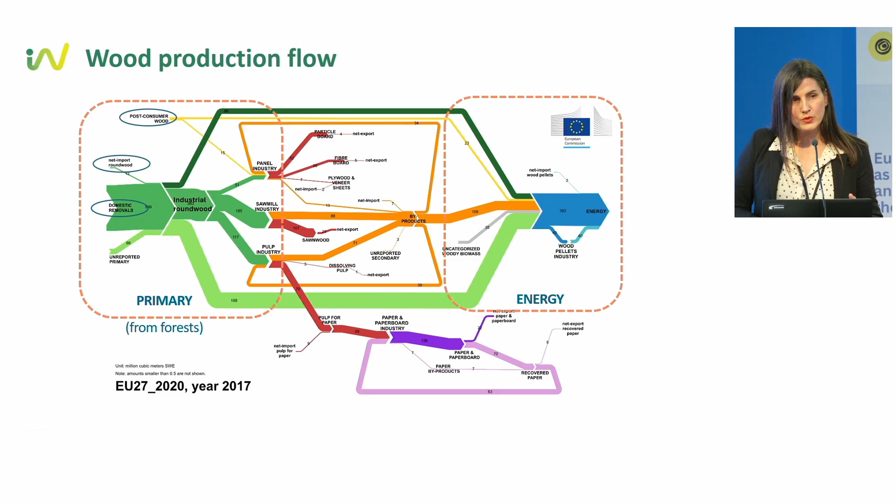Focusing on the first part, maybe it was not yet presented today, so I think it's good to have this general overview. Most of the wood used in the European industry - this is EU27 - comes from domestic removals, from primary wood from the forests, and a small part comes from recovered wood or also from imported round wood. The main 3 industries are sawmill industry, panel industry, and pulp. And sawmill industry consumes most of the logs from the domestic removals.

As we can see here, part of the domestic removals directly from the forest go to energy. And there are secondary products or byproducts, which are residues or secondary products from the industries, which can be used again in the industry, as we can see in the panel sector and in the pulp industry. We don't have data yet for the sawmill industry, how many reclaimed or reused or secondary products from the industry are used again in the sawmill industry. But most of the byproducts go also directly for energy.

So this is a picture for 2017, but what we would like to have is more added value products used in a cascade use before sending it to energy. This is a picture of 2022. This is data provided by FAOSTAT. We can see that from the domestic removals in EU27, 25% go directly to energy, and the industrial roundwood...

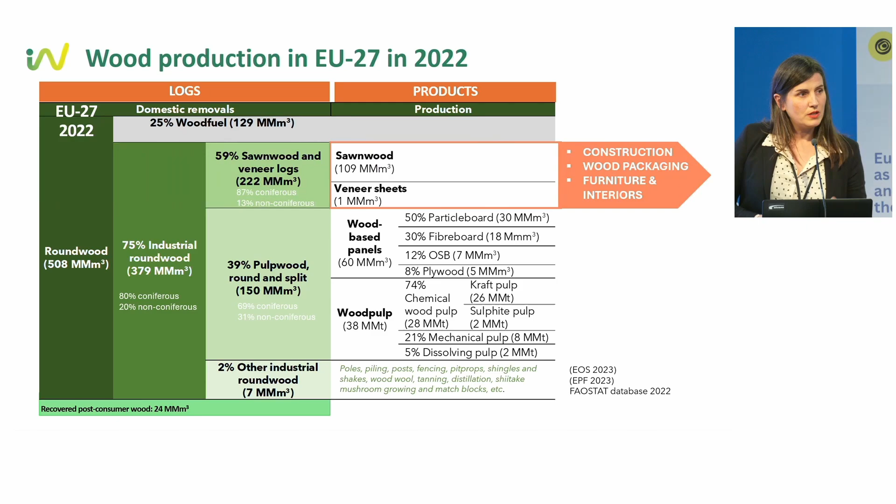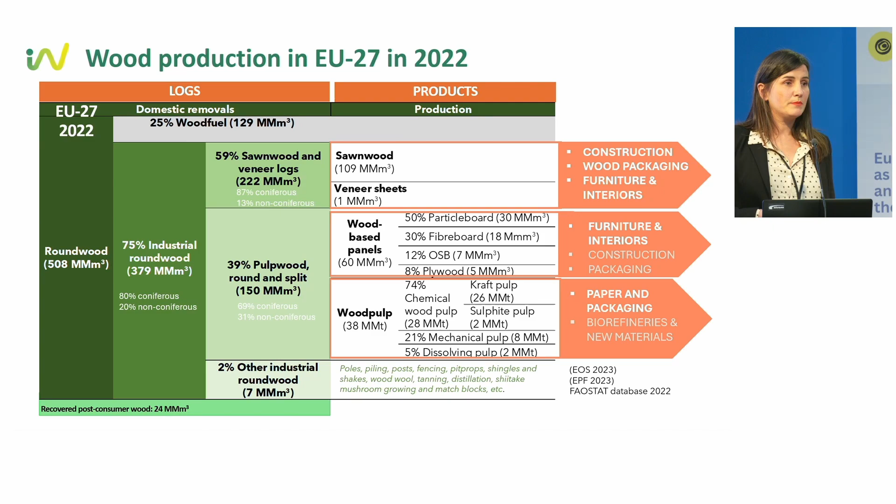The sawmill industry is mainly focused on construction, but also wood packaging, furniture and interiors. Wood-based panels are mainly for furniture, but also for construction and packaging. And wood pulp is mainly for paper, pulp and paper, but also for biorefineries and new materials. Focus now on sawnwood products. We can see here the historical trends in sawnwood production, and we can see the difference between coniferous and non-coniferous species, or softwood and hardwoods.

We can see that there is an increasing trend in softwood production, but there is a stable market for non-coniferous species, which is very, very low. Of course, we don't know the end uses of this quantity of sawnwood production, because the public databases don't provide this information, but based on several reports, we can say that around 10-12% of this sawnwood is for the construction industry, and around 7.4 million cubic meters for structural products.

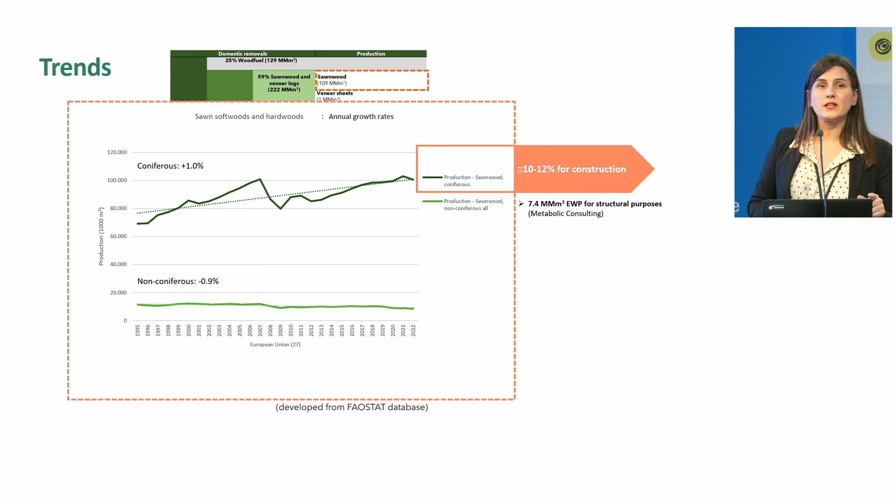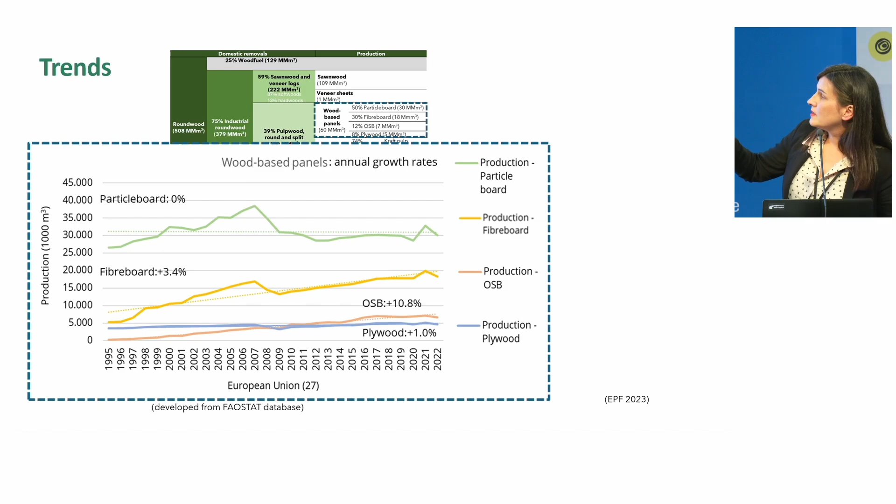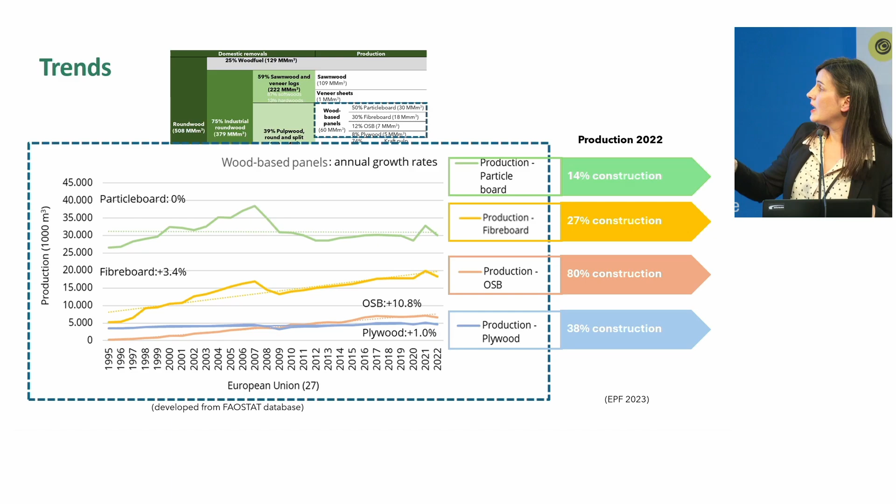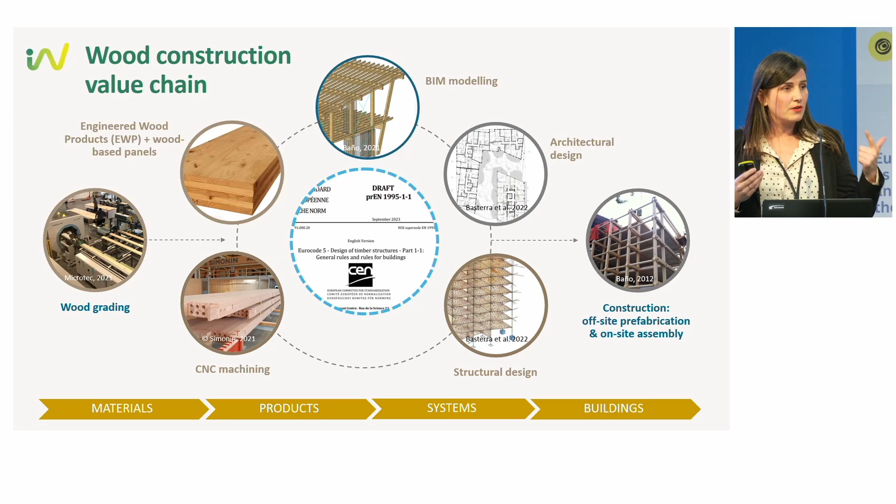Okay, this is just a general overview of the wood construction value chain. Our intention is to develop or design more industrialized timber buildings, and to do that we need to take into account many things: the architectural design, the structural design, the standards, the codes, also the modeling of these structures, and how to connect these models with the industry through CNC machines, numerical control machines, for shaping these elements. But at the first stage, we need the wood from the forest, and we need to know the properties of this raw material to develop elements for construction: glue-laminated timber, cross-laminated timber, and panels.

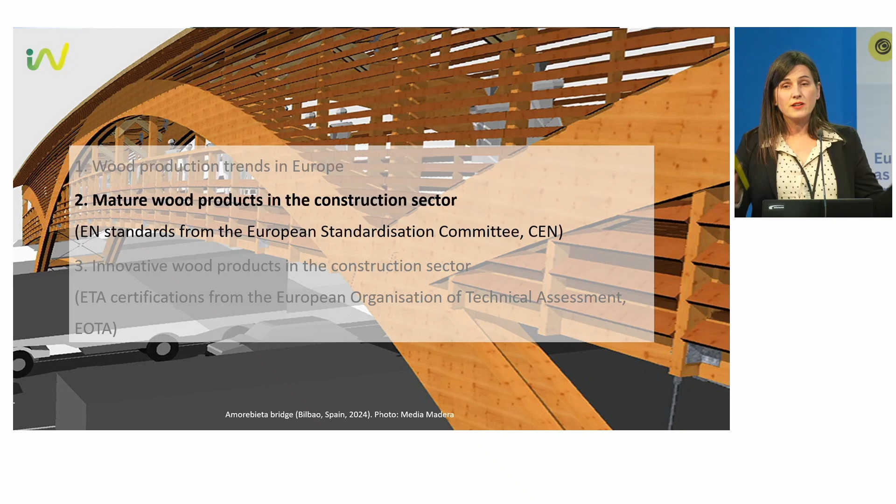Focus now on the construction sector, on mature products. We can say digitalization is a challenge for the construction sector, but not so much for the timber construction sector. Here's an example of a timber building, a timber bridge in Spain from 2004, 20 years ago, which was developed in a BIM model or CAD/CAM model and then manufactured on a numerical control machine. So timber construction is a pioneer in digitalization of the construction sector, and the rest of the construction sector needs to learn from timber construction.

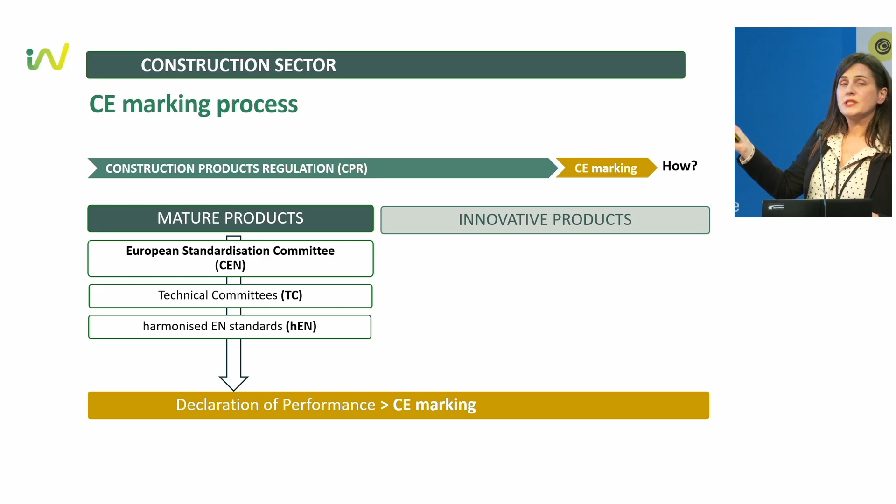Okay, what are mature products? We can say all the construction sector is regulated by the Construction Products Regulation, and to market any construction products in Europe, you need to obtain the CE marking. Mature products are those manufactured following the harmonized European standards, so you can obtain a declaration of performance and then the CE marking. Innovative products are products which don't yet have these harmonized European standards.

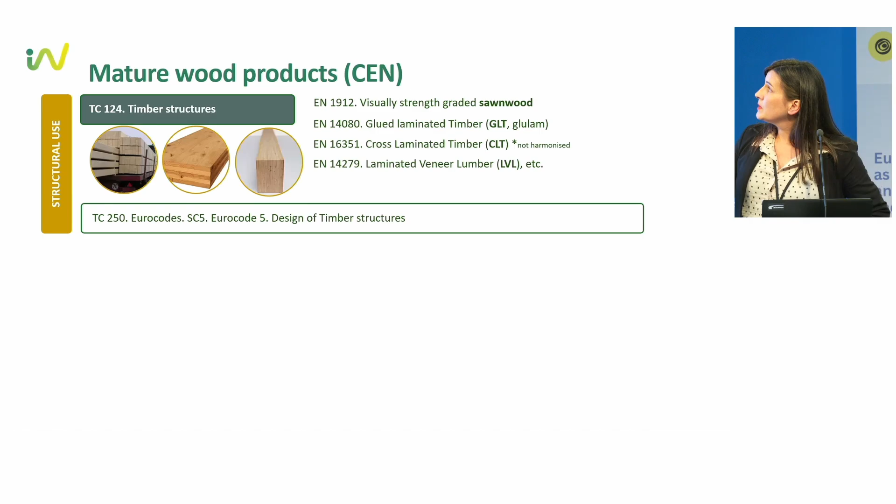Which are mature products? We can divide them into structural use and non-structural use. Structural use is, for example, glue-laminated timber or LVL, and non-structural use can be wood panels and other round and sawn timber for wood flooring, cladding, etc.

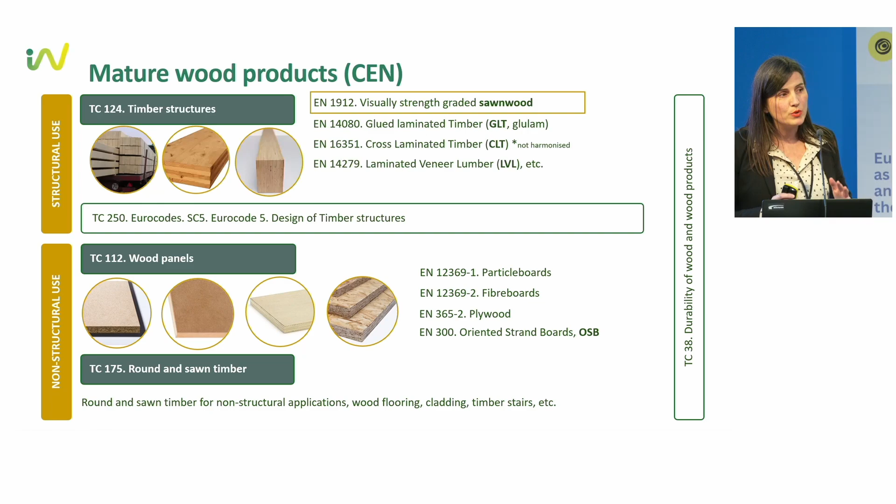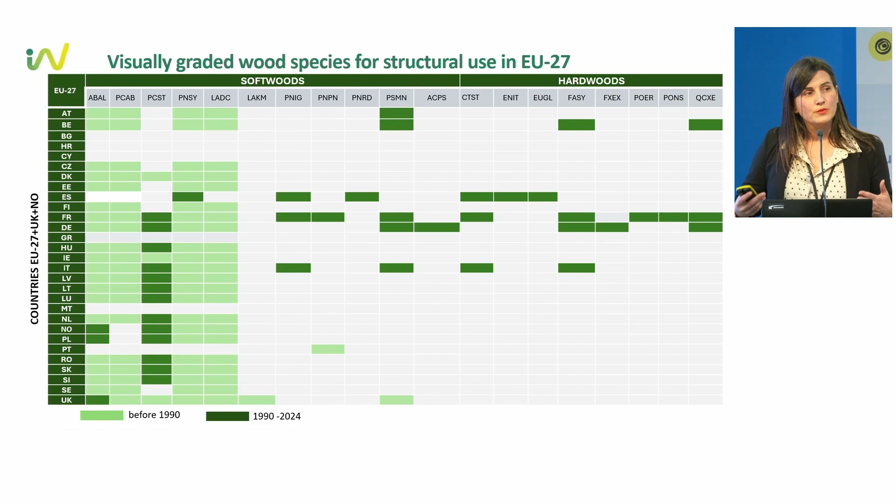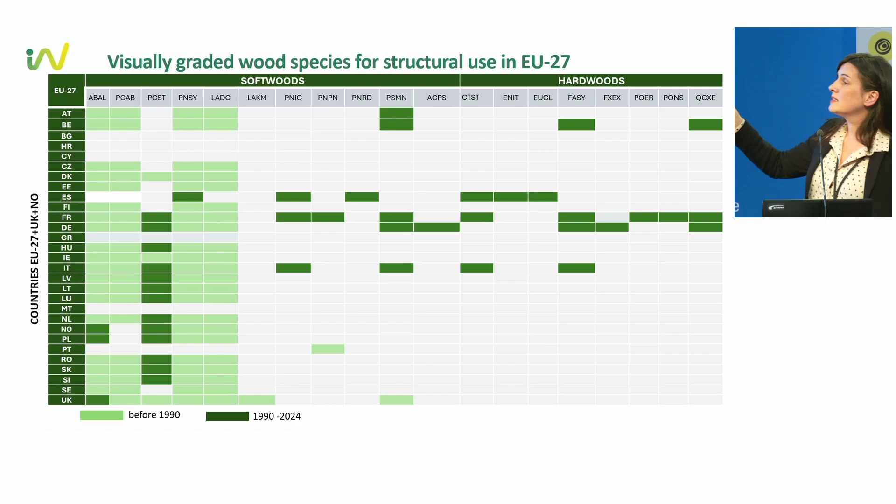But there is a trend toward diversifying into more wood species, and we can observe that from the 90s to now, there are more softwood species graded for structural applications, but also hardwood species. However, we can see this only in some countries. There is no common trend; there are some initiatives depending on the country.

Going now to the innovative products. What are the innovative products? Following the same structure, we denominate innovative products as those which can obtain the CE marking through an alternative way. When there is no harmonized European standard yet, you can go through the European Organization of Technical Assessment to obtain an intermediate certification, named ETA, and then obtain the CE marking to market your products across Europe.

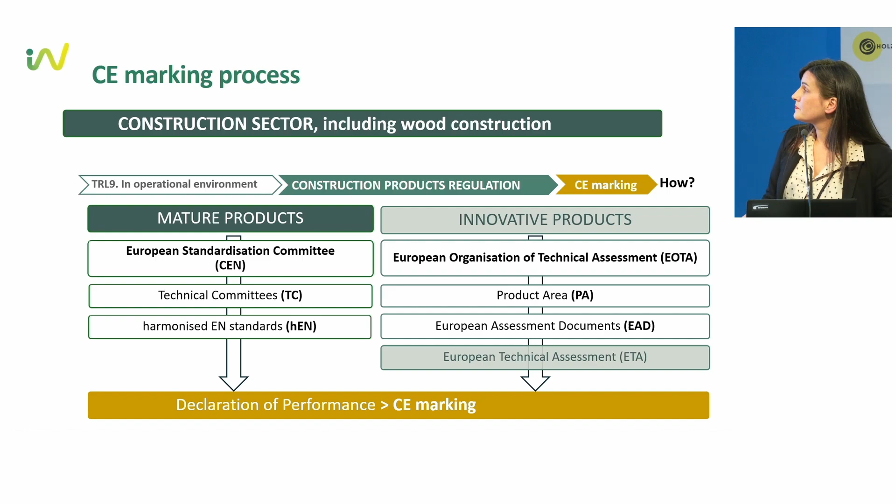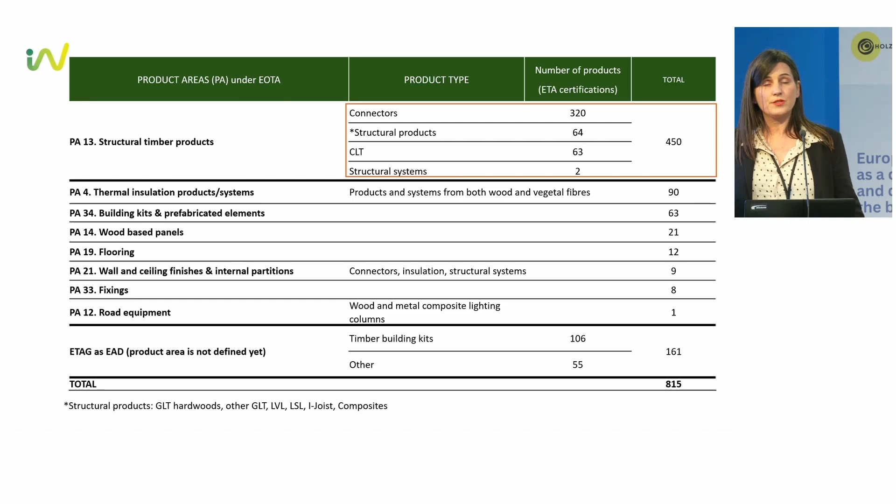Analyzing this EU database, we scanned all the construction products with ETA certifications in Europe, and identified 800 ETA certifications using wood, structured into these product areas. We can say most of the products are related to structural timber construction with 450 products, but in this case, most of them are connectors. Followed by timber building kits with 100 products, and thermal and insulation products and systems with 90 products.

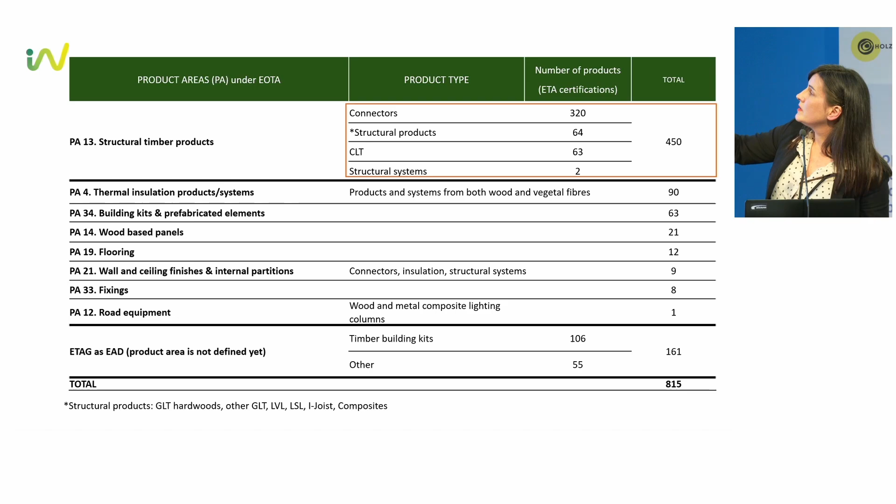Focusing now on these structural timber products, just to show some examples. There are some examples of innovations, most of them are connectors—it's still connectors—but there are even wooden connectors.

Of course, CLT is here as an innovative product because there is not yet a harmonized standard for manufacturing this kind of product. And in structural products, we can observe, for example, hardwood glulam, which was presented this morning in several presentations, or prefabricated slabs, I-joists, or other kinds of innovations.

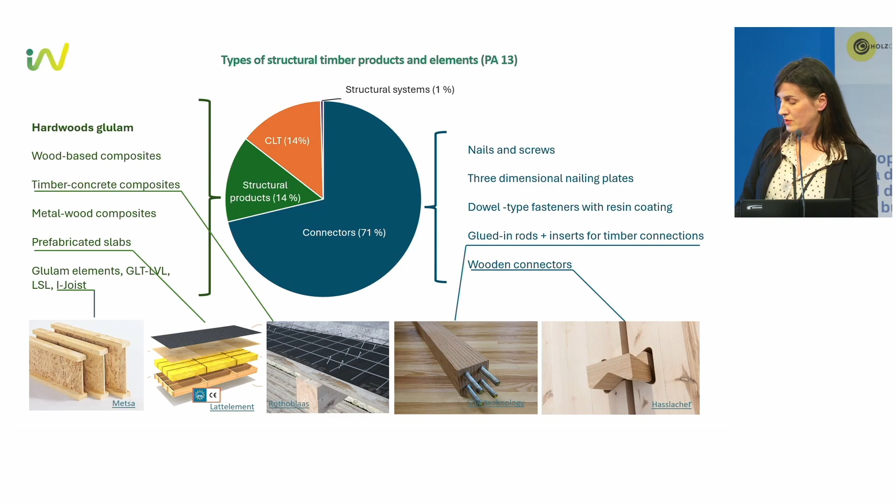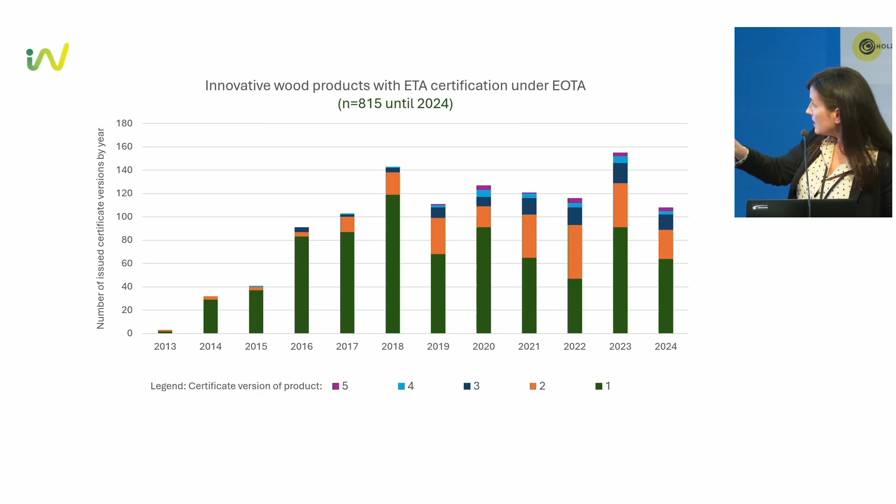Here we can see the trends in the development of these innovative products already on the market, and this is an increasing trend. These numbers correspond to versions, because maybe there is a new innovative product in its first version, shown in green, but sometimes products need to be updated, so there is a need to review the ETA certification with several new versions. We can see an increasing trend peaking in 2018 and 2023.

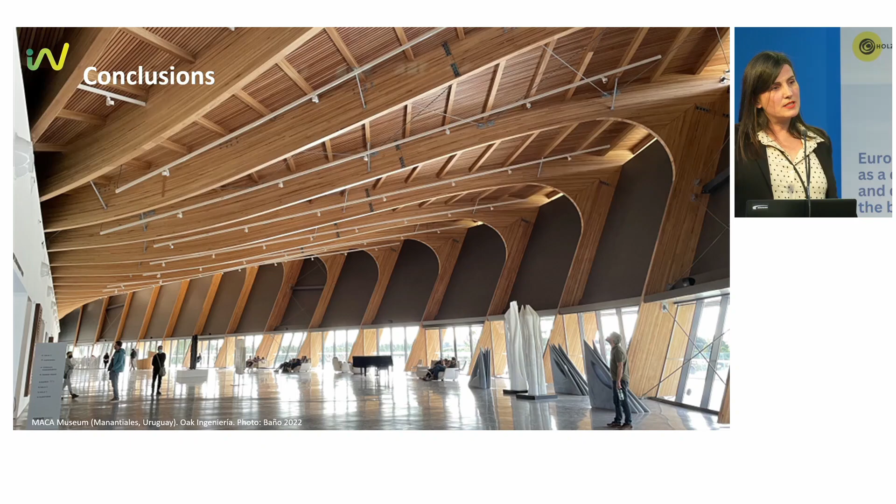This is a eucalyptus glulam timber building in Uruguay, South America, which used local resources, with eucalyptus lamellas from Uruguay, using Eurocode 5, European standards, using the European standard for manufacturing glulam beams of hardwood species, which is not yet approved, not yet a harmonized standard. They used all this knowledge that Europe has to develop a flagship project there.

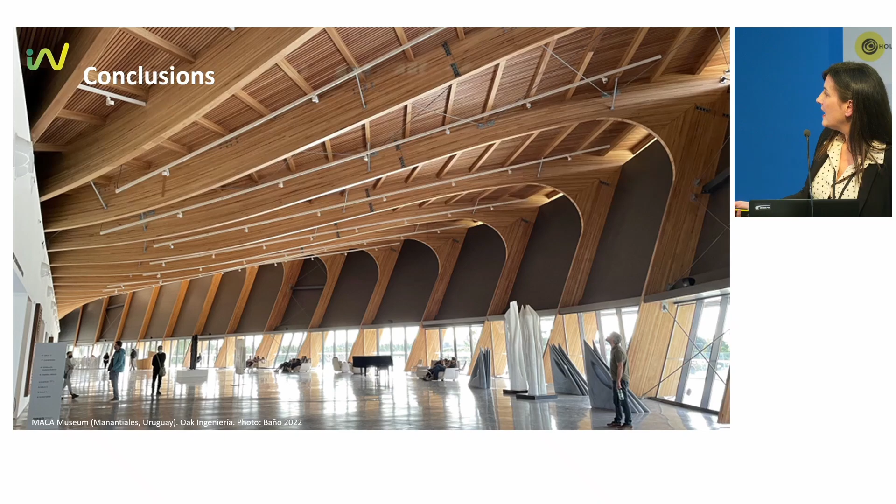So we in Europe have a responsibility, not only in Europe, but worldwide. And as a conclusion, there is a historical increasing trend in Europe in the production of softwood, mainly softwood species, and wood-based panels.

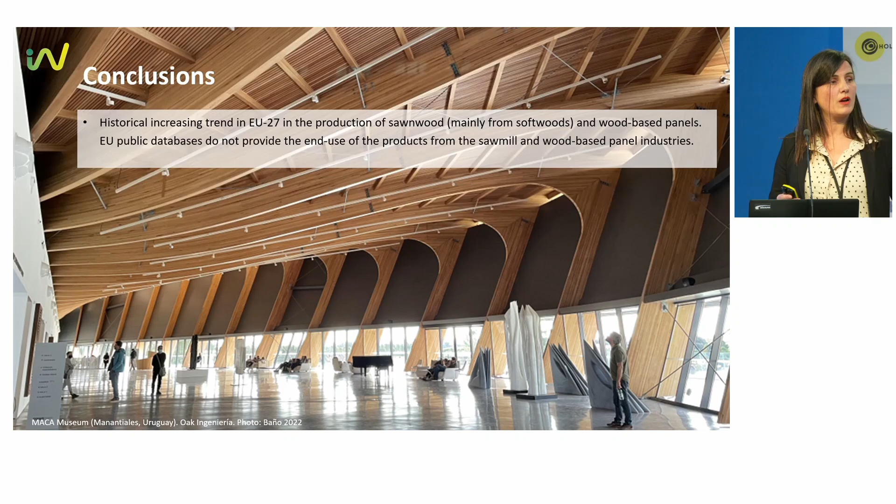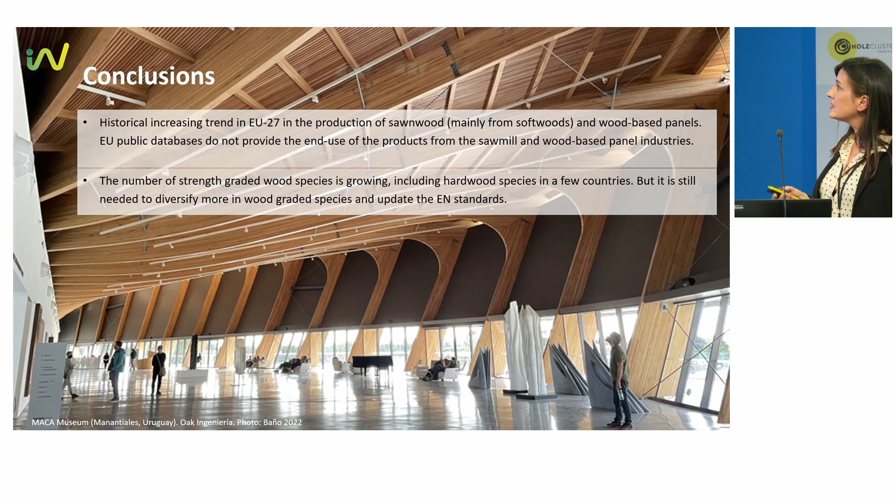The European public database does not provide the end use of the product, so it's not so easy to follow how many of these products go to construction or to packaging. The number of strength-graded wood species is growing, including hardwood species from some countries, but it's still needed to diversify more in wood-graded species because of climate change and the increasing demand for wood. And of course, there is a need to update these EN standards with the mechanical properties of this wood.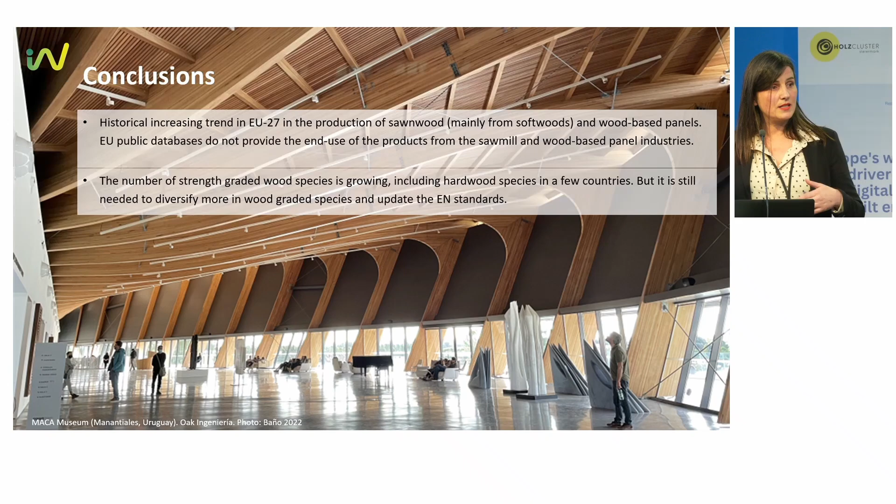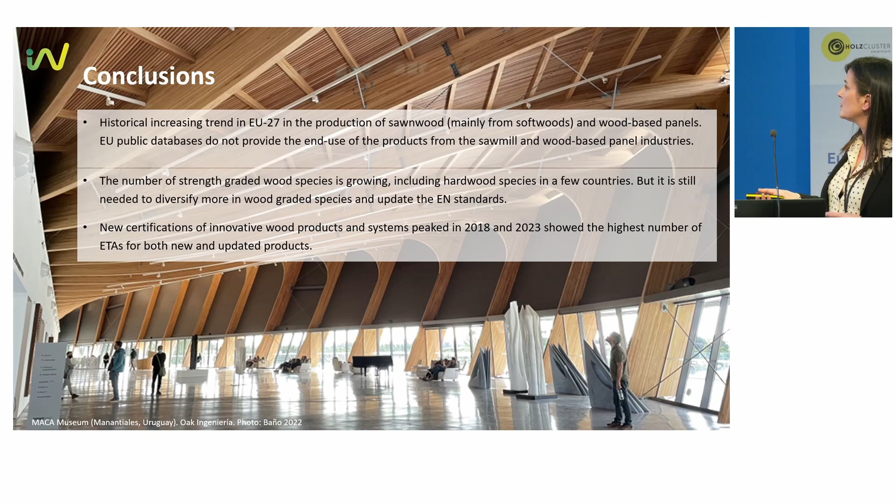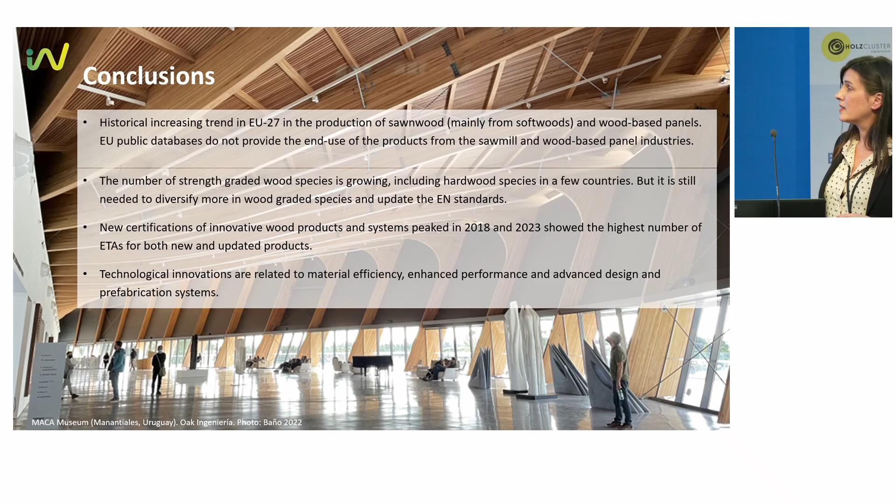There are new certifications of innovative wood products and systems, which peaked in 2018 and 2023. The technological innovations are mainly related to material efficiency, enhanced performance, and advanced design and prefabrication systems. Finally, connectors, structural products, timber building kits, and thermal insulation materials are leading the innovations on the market.

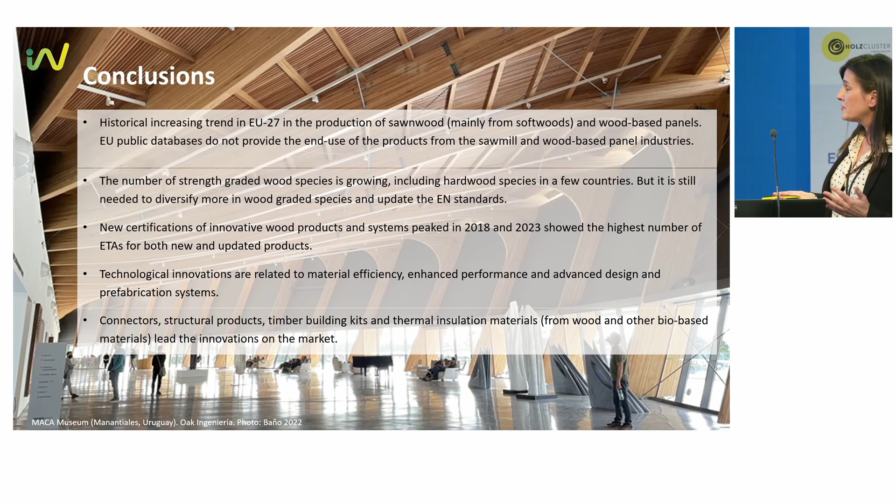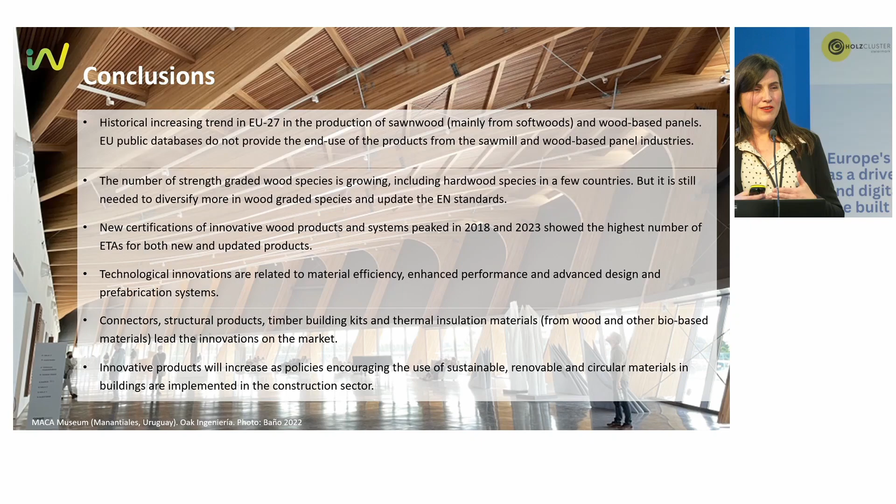And finally, I think there is one more point: new policies enhancing the use of sustainable wood products and circular products will also lead to developing more innovative products for the construction sector. This is all for our part. Thank you to my colleagues for this presentation.

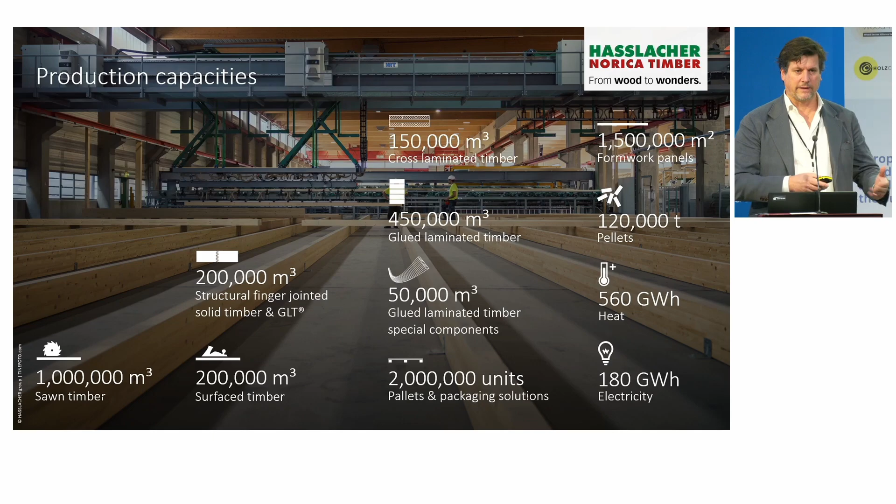We have a principle of cascade using, but we also always have to look at sustainability. When a tree grows, only a certain part is really usable for structural purposes, and the rest of the tree we need to use for other products. When you produce energy on a sawmill site, I think it's the most efficient way to use the residues and also to tackle climate change in terms of replacing fossil energy.

Sustainability is one thing that really stands for this industry, and that's very important in light of the discussion of EUDR. It is in our best interest that we have well-managed forests, that the forests are growing, that they are not disappearing, and that we have raw material also for the future. If we were careless with our forests, we would be out of business tomorrow. So we are very much aligned, but we need to think about the systems for how we can provide for sustainable forestry. I believe we should keep it simple and not over-bureaucratize it, because otherwise it will not work and in the end will not achieve the goal we all have in common.

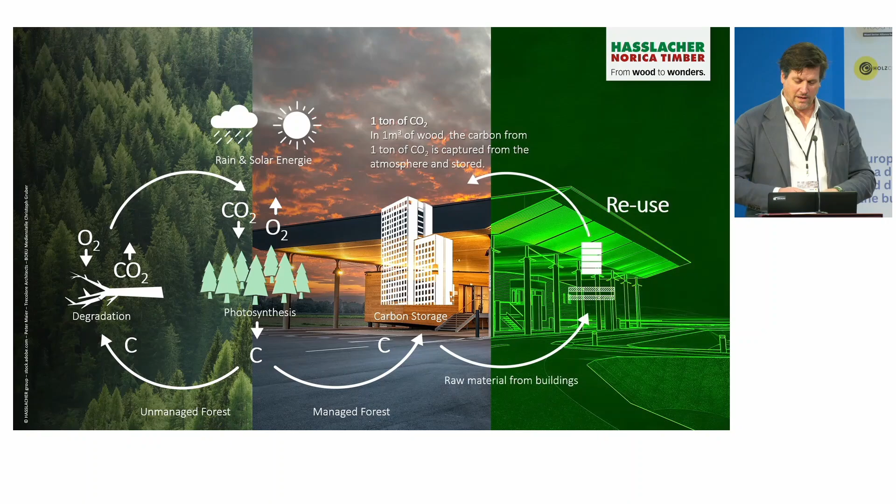Yeah, so we have been through this the whole day. I'll get back to the reuse, because that is really a very important argument for the following innovations, also why we can sell these innovations in the market.

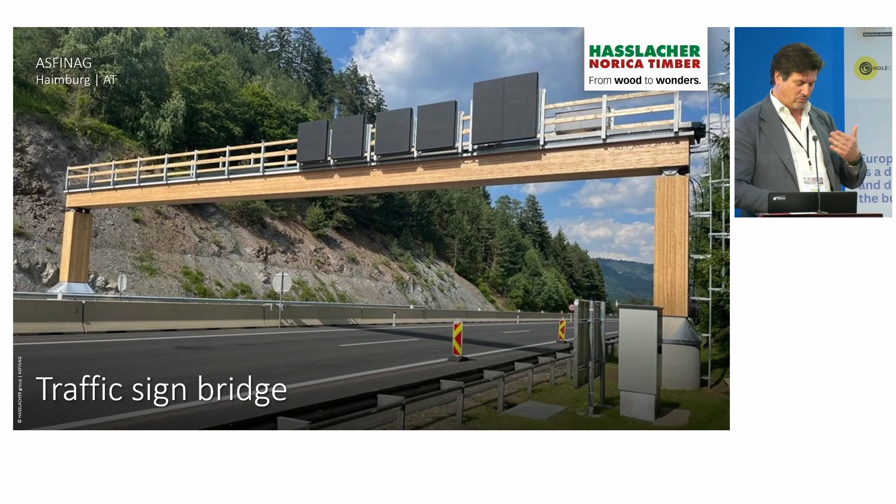The wood is made of larch, and we also want to prove that wood is a very durable building product. You can do the same with standard infrastructure items like bridges, because the lower part of the bridge is the part that really carries all the weight.

Typically this is a very cost-intensive, labor-intensive part. You bring the scaffolding, you put in the concrete, you need to wait until it's durable, and it takes a very long time. In this case, we were prefabricating the whole structural beam of the bridge, and then the surface acts like a roof for the wooden structure. We are also pretty sure that the durability of such a product is very, very high.

And the last innovation I wanted to show you, and that's a good example of modular construction, these are the bicycle ways which have been developed by a startup in Switzerland, where we took some shares to support them.

The idea is on one side very simple, but also very innovative, refined. So you have a column system that you can very easily drill into existing streets, for instance, or even in uneven terrain. And then you have a wooden bridge, let's say, of 20 meters, which can of course be adapted to the use, with also the pavement, the street. You have 1 cubic meter of wood per meter length of the road.

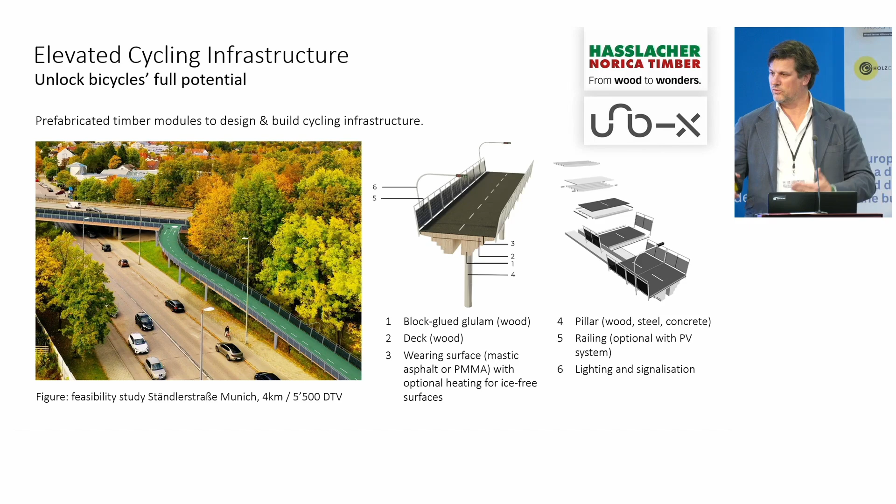Again, the advantage is that it is very fast, so once the decision is done - obviously it takes the municipalities and the public process very long to decide where to put it, how to put it, you have all these administrative barriers to overcome - but the system is very, very simple. Especially for cities where space is becoming an issue and getting closer, to bring all the bicycles on the second floor, and therefore also a solution not only in an innovative, environmental-friendly way to build, but also to remove the traffic from cars to more bikes in cities.

So these are some examples of the future use of wood. It all starts in the mind, and please take this with you and encourage everyone to think about if there could be a better wooden solution. Thank you.

Good afternoon, everyone. We'll try to keep it short. In the next 10 minutes, I would like to make some concrete suggestions to all of you to team up to unlock capital to accelerate the timber revolution and transition in the built environment. So let's start from the big picture and move our way down to our world of technology and construction.

The EU Commission recently has been very specific, setting clear expectations for the new EU Commissioner for Energy and Housing: enhance the environmental performance of the built environment, build more affordable and sustainable housing, and raise more capital to deliver on this.

Now, policymakers do realize that these large transitions require significant capital and come with challenges. If you look at the overall ambition of the EU to reduce greenhouse gas emissions by 2040, it essentially implies that between now and 2040, close to 10% of the total EU GDP needs to be invested to achieve that target. And 75 to 80% of that required capital, annually required for the next decade to 2040, needs to come from the private sector.

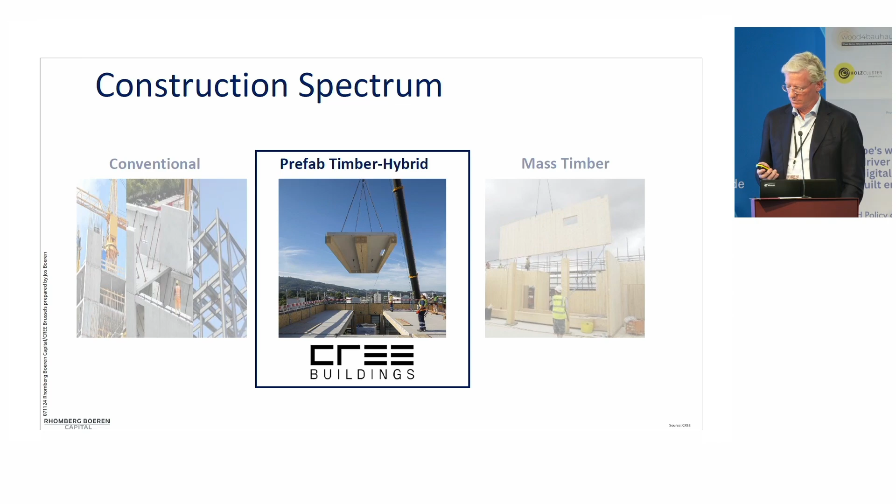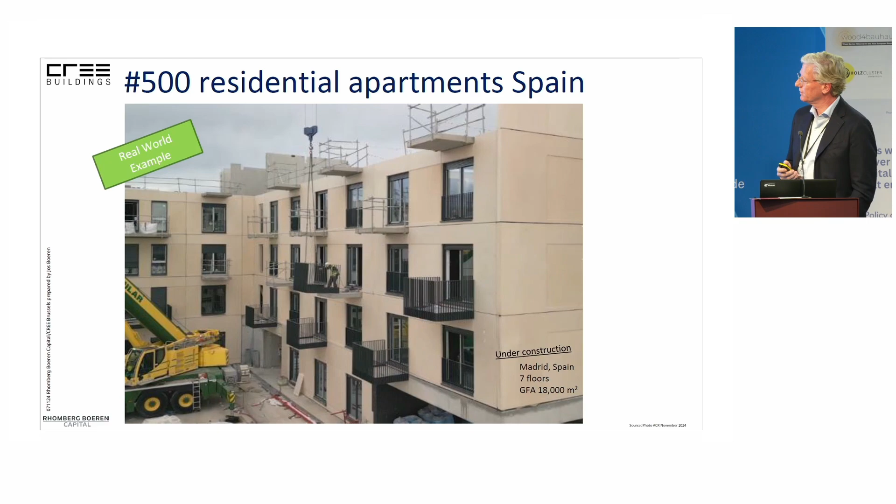Examples of what has been delivered with our technology: the HQ of Vattenfall in Germany, currently building 500 residential apartments in Spain. Most of you are familiar with this company, founded by Hubert Rhomberg in 2008. First building completed in Austria in 2011, and since then, 21 buildings completed, in 9 countries, across 3 continents. One of the key things I personally really like is that this concept can travel across borders - it's flexible, it can adapt to local building codes and local supply chains, utilizing existing local supply chains. It's a network, an ecosystem. A lot of partners which are part of the CREE system share best practices, learnings and know-how, which has proven to be incredibly powerful.

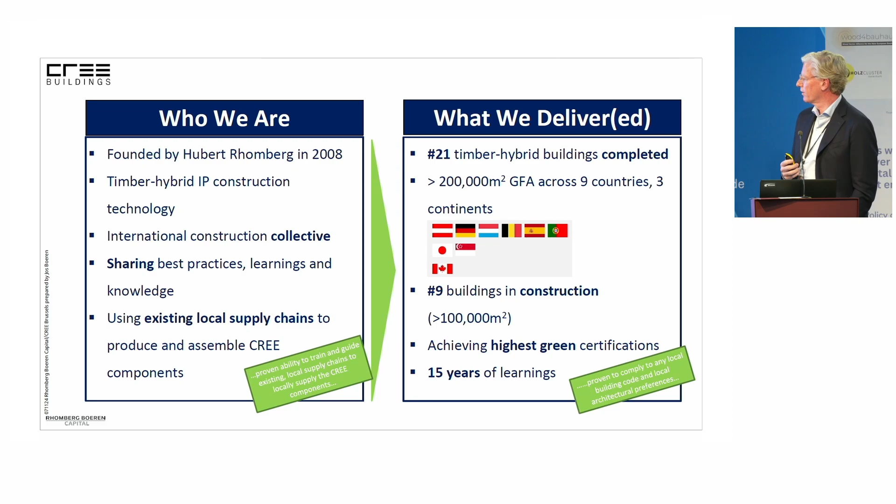Now, going back to what I promised in terms of sharing a real-life example. I don't want to go into too much detail, but if you look at the transition risks coming from institutional investors, they're very obvious, listed on the left side. Essentially, what I want to convey here is that as an industry we need to translate our real-world expertise and experience into their language, which is a different language than I've been observing today. So we need to provide comfort, go fact-based, and educate them that the perceived transition risk, often perceived as very high, is manageable.

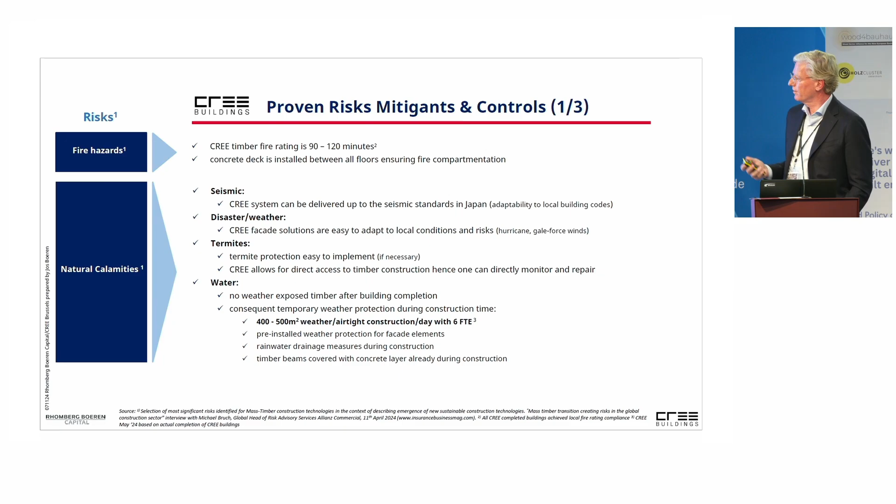CREE is just an illustration - I've heard many other companies speaking about how they navigate and mitigate risk. I think you need to illustrate that with data. Here's an example: in terms of fire hazards or nature, CREE can manage that. We won't go into detail, but here's a fact-based assessment.

In terms of construction risk, which is a major issue for investors when they think about the required transition, it's all about the availability of people. In addition to know-how and consensus that something needs to change, is the technology ready? But secondly, do we have the manpower to execute? This is an example of their assessment of how they look at transition. Do they want to allocate capital to where there's a shortage of labor? What's the alternative? What can mitigate the lack of skilled workers?

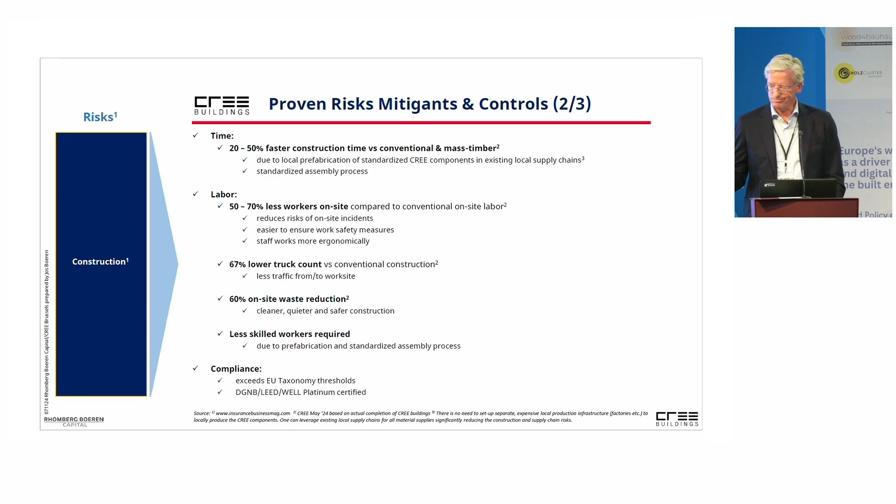Here's an example of what CREE does to mitigate this: it needs fewer workers on site, it needs fewer skilled workers, and it is compliant with the EU taxonomy, etc.

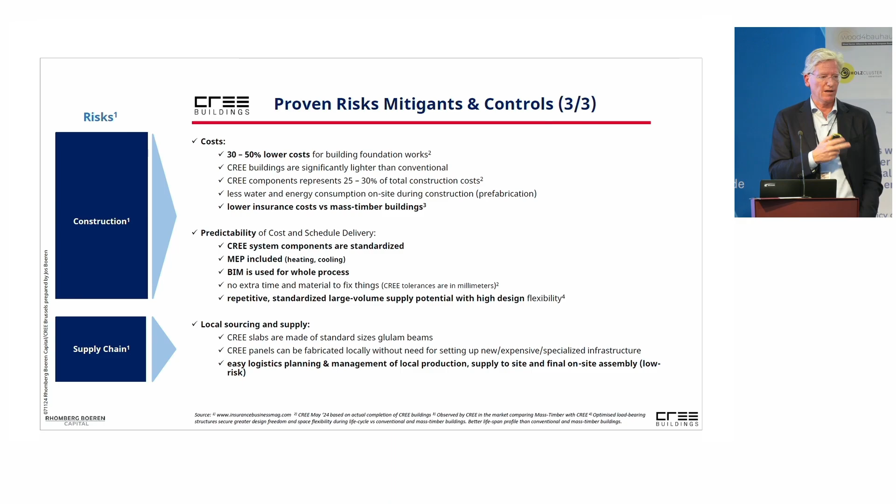In terms of construction, what does the system represent? I've heard it earlier today that in the end we need to industrialize and standardize. This is an example of illustrating to the investor that this can be replicated and scaled because it is standardized. So you are de-risking execution, de-risking a concept that can travel throughout the EU - actually it has proven to be able to travel the world. These are very high comfort factors for investors to consider allocating large tickets to this type of transition.

So let's stop here. Final page.

Give you some insights on our journey. So the track record is there, as you've seen, and I think many of you can share a similar track record. But the next stage in that journey is to really start to feed what we have proven, what all of you have proven, with data.

I think that's the key deficiency at this point in time. Of course, there's data on individual projects, but you need to create an investable universe around it. If you look at real estate, just the traditional, there's a lot of data for benchmarking to prove commercial return, to prove efficiency, etc. And I think timber, I mean, all this data and expertise is available. It just needs to be consolidated and shared.

And again, I think that's an invite to all of us, including myself, is to start sharing what we know and structure that data. And then, the other thing I've been observing, and I fully sympathize with, I think we need to break these walls. There's a lot of resistance to change. If you look at architects, GCs, across that whole traditional value chain, I think there are many incentives to start working together, and I think it starts with direct dialogues, and take one business case that works and try to replicate that at scale.

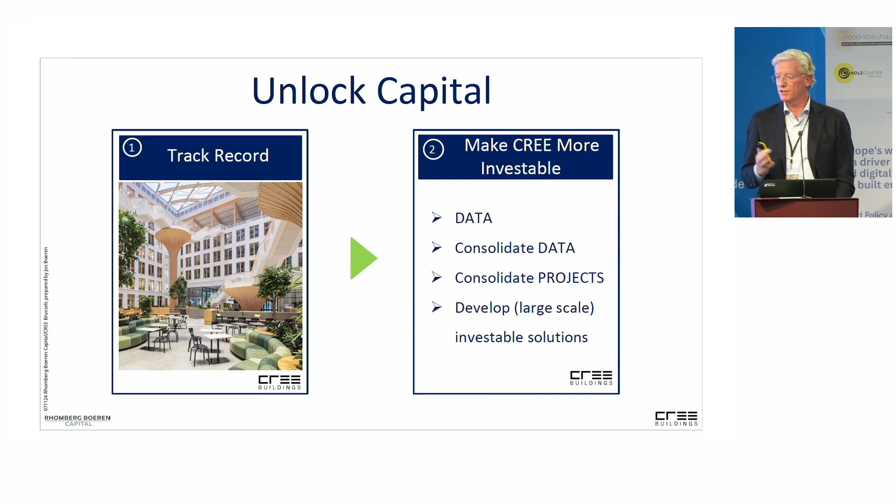So that's an invite from our side to engage with us and connect, and happy to share our learnings, but also our failures. So, thanks. Over to you, Xavier.

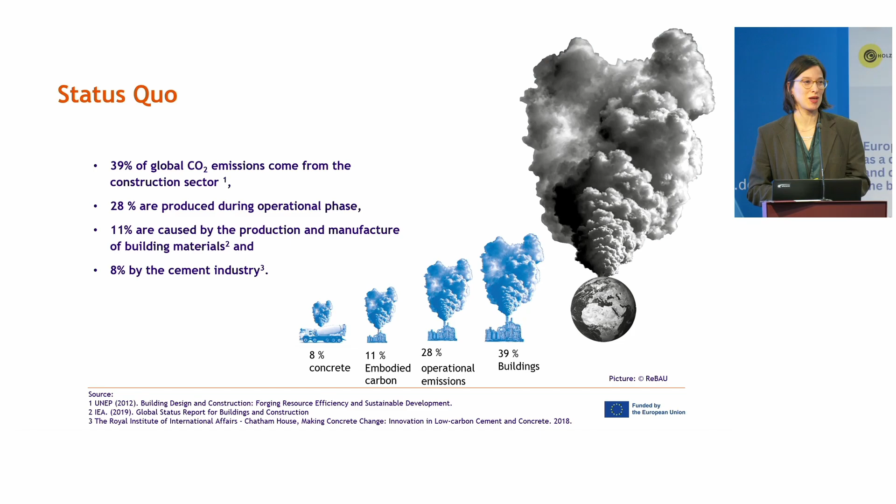So we heard a lot about today why the construction sector is performing bad in terms of CO2 emissions. Here's just a picture of it, that 40% still comes from the construction sector, and while looking a bit deeper into it, where do these carbon flows come from? It's mainly from the operational phase, so how are we operating our buildings, but also how do we produce our buildings? So 11% comes from the embodied carbon stored. And this is maybe a good sign for some of you, most of the emissions come from the concrete production.

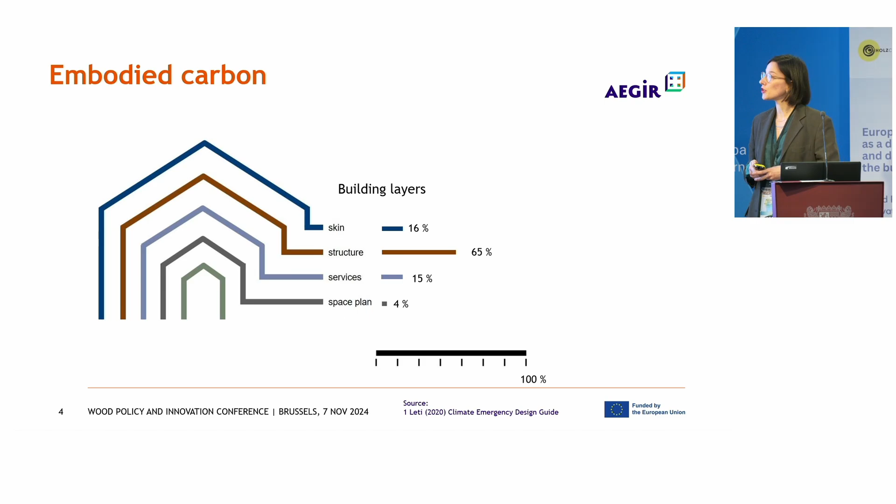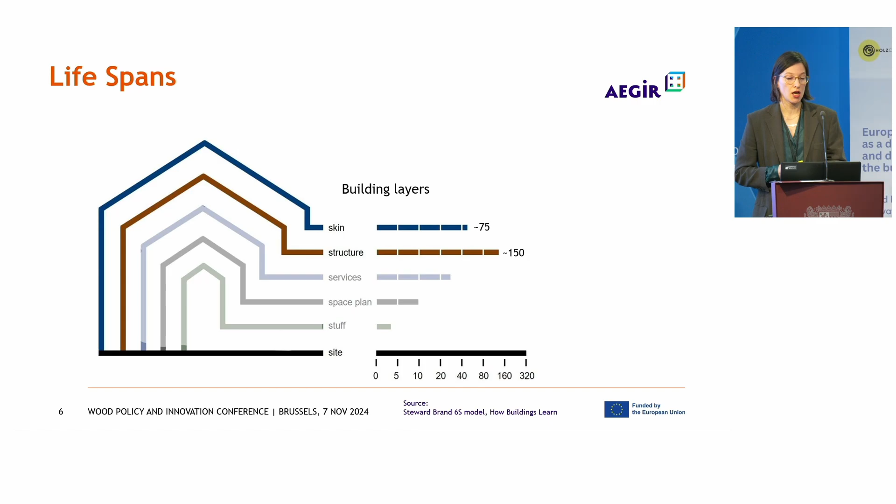So while zooming a bit in, where are these carbon flows coming from in terms of the building layers, we can see that most of the carbon is caused by the structure, but also from the skin and the services within the building. But also when we look into what materials are lasting the longest, we can see that it's the structure that is actually lasting the longest, up to 150 years, and also the skin of the building can last up to 75 years.

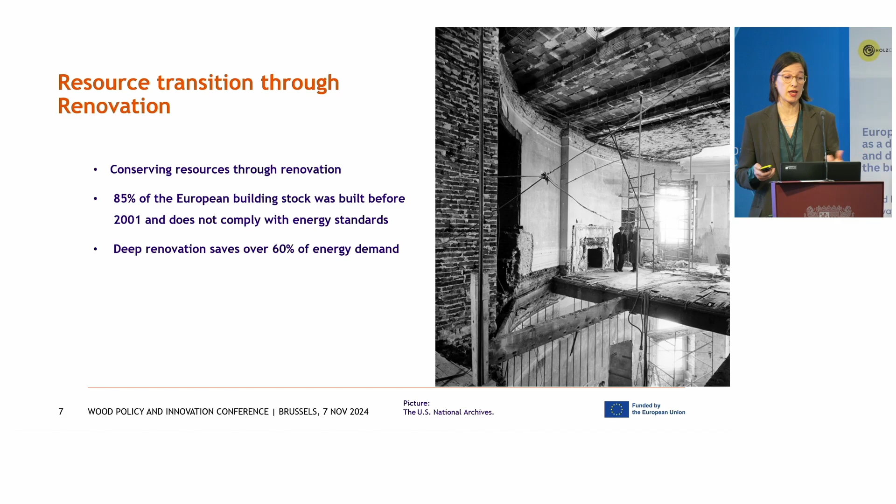So that means that we should preserve this material, we should look into the structure and the facade, and renovation is one possibility how we can conserve our resources, how we can make this transition happen. But while looking into our building stock, we have a problem with it. We need to renovate it. We need to deeply renovate it to save up to 60% of energy, because almost all of our building stock is built before 2001, so it doesn't comply anymore with our energy performance restrictions.

So these problems we are targeting in AEGIR. I'm not going to read out the entire title because it's a bit long, but just some buzzwords: it's about digitalization, energy, circularity, but on top of it, of course, facade renovation. So we are several partners together with InnovaWood. We are from 9 different countries. We are in the middle of the project, so we have 2 years to go.

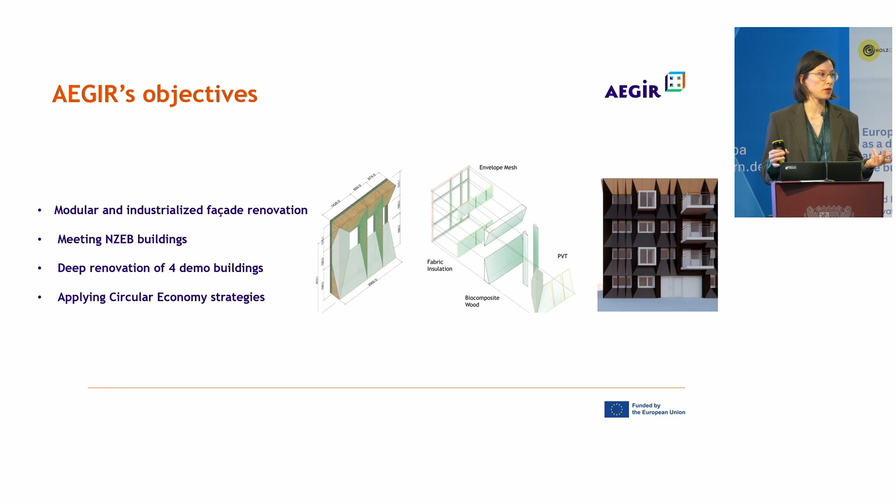And what we're doing there is that we want to provide a modular and industrialized facade renovation. We want to meet with this facade renovation a nearly zero energy building performance. We want to renovate 4 different buildings in 4 different countries, and we want to apply circular economy strategies.

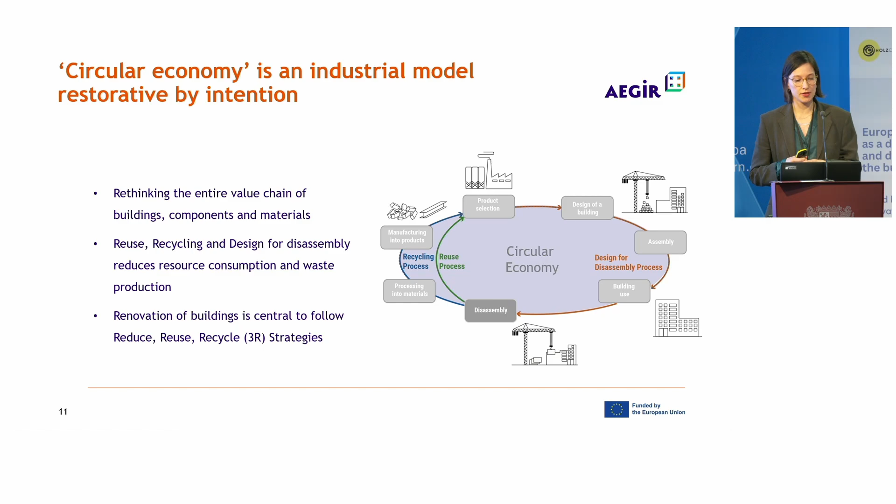So what are these circular economy strategies? So we need to rethink the entire value chain, so we are looking into materials up to the building scale. We want to do that through design for disassembly, through reuse and recycling processes. So we really need to close this gap, and renovation is actually really targeting these goals of the 3R strategy, so it reduces the use, reuses and recycles buildings.

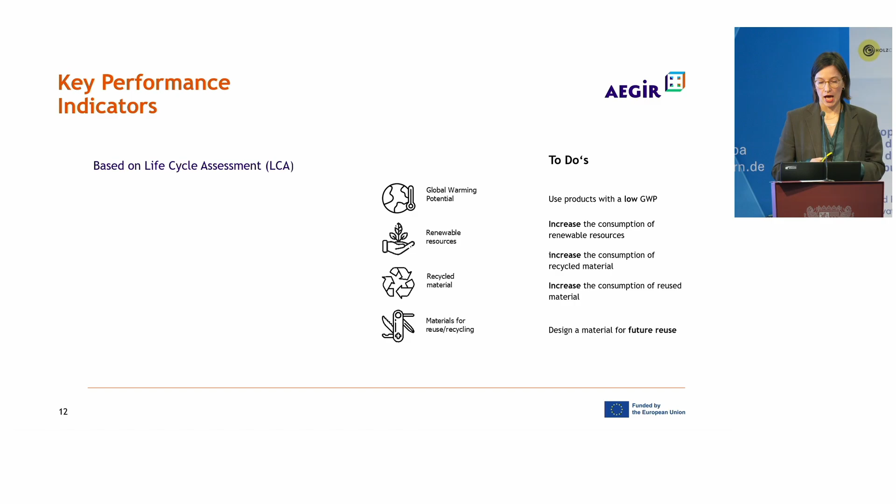So before we started, very early in the project, the first thing we did is that we developed KPIs, key performance indicators. We didn't invent them, but we took them from standardized methods such as the LCA. And besides, of course, reusing and recycling materials, we also included the global warming potential.

So this was, in our view, not enough, so we looked into a broader vision of what circularity is. We looked into the levels framework which assesses circularity, so we added durability, but also how do we manage data in our process, and of course how can we demount buildings in the future.

And then we said, okay, it's still not enough, we need to look back into what circularity actually means. So we had a look into the cradle-to-cradle approach and the R strategies, and added several more of these KPIs. We need to apply these on different scales, so from component assembly to building level, there's always different requirements on these KPIs.

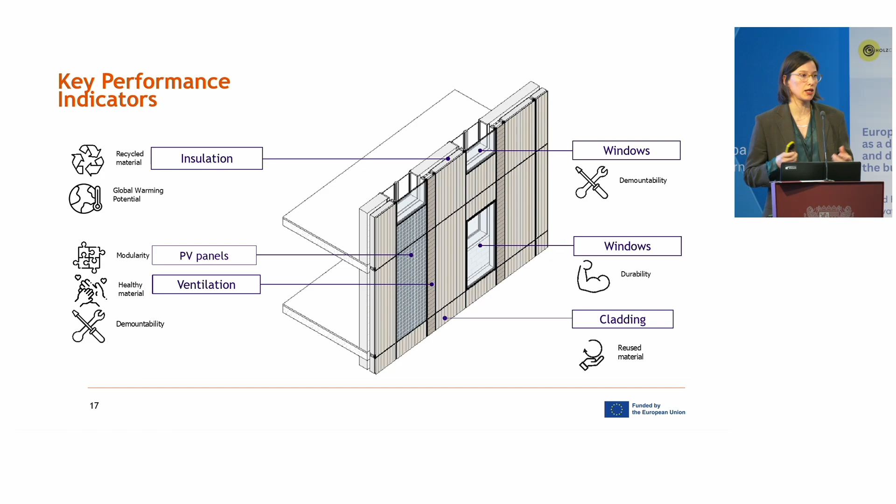So what we first did is we looked into the component scale. We deeply looked and analyzed the materials we are going to use in this project. For example, we looked into the insulation, based on a standardized method, the material flow analysis.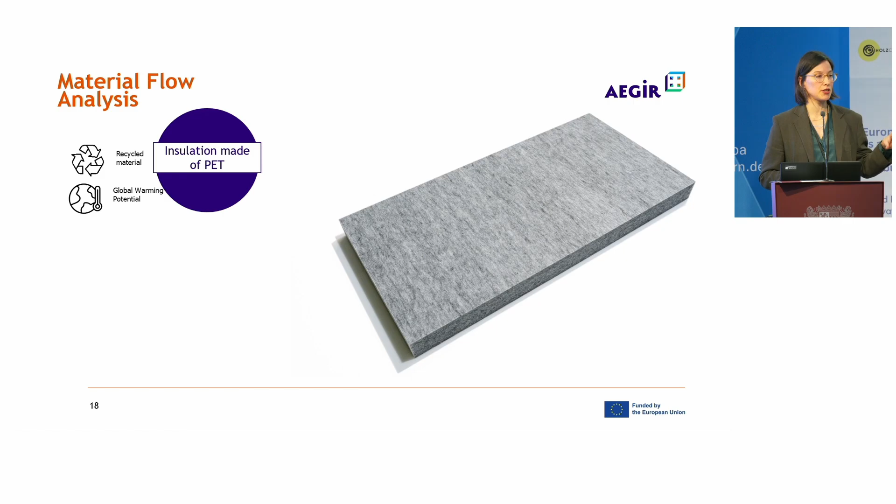We analyzed, for example, an insulation which is made 80% of PET, and we looked into its embodied carbon, and based on this, we looked deeper into what materials come into this product. Is it made of recycled secondary material? We assume that then the carbon emissions are almost zero, or does this material come from primary resources, such as the polyester fibers?

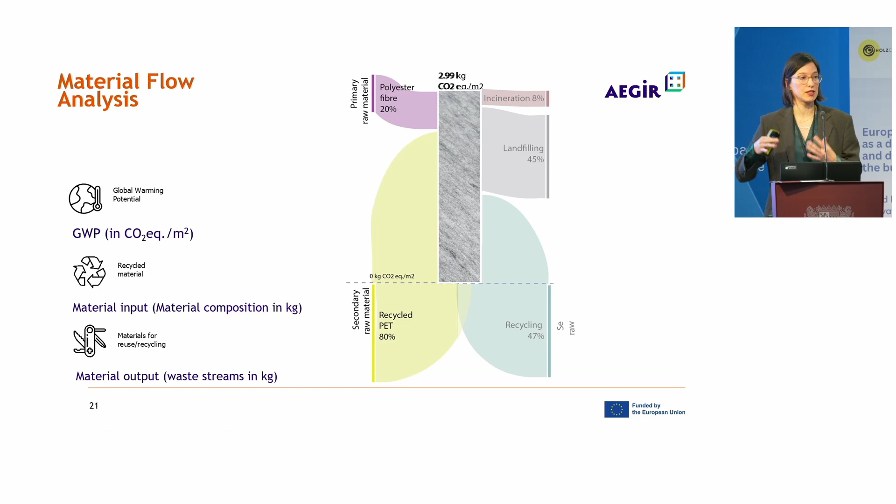And then we also looked at what is going to happen with this material when it's not needed, when it reaches its end of life. Following the LCA approach, we looked into the state of the art today, which can be improved in the future, but it's hard to estimate. That's why it's not as visible in this graph as the material input is.

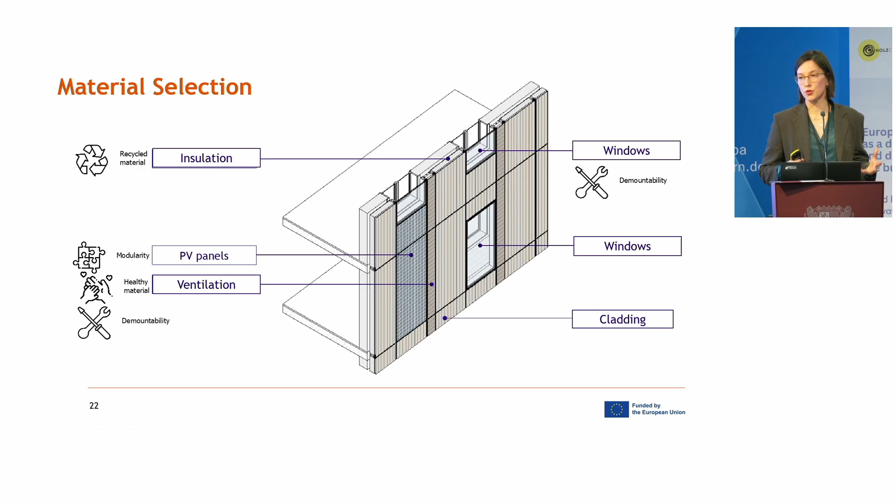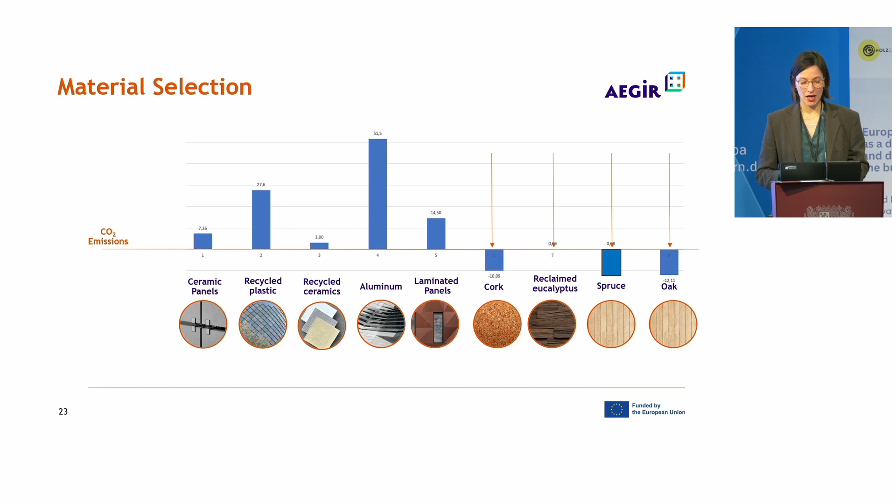So after analyzing the products which we knew we're going to use in this project, we also needed to find new materials. So we are actually giving advice to the architects on what they can use for cladding, again based on a methodological approach. We looked into the CO2 emissions for several different materials, including the architect's favorite material, aluminium, which performs the worst. But of course, renewables perform very well in terms of CO2.

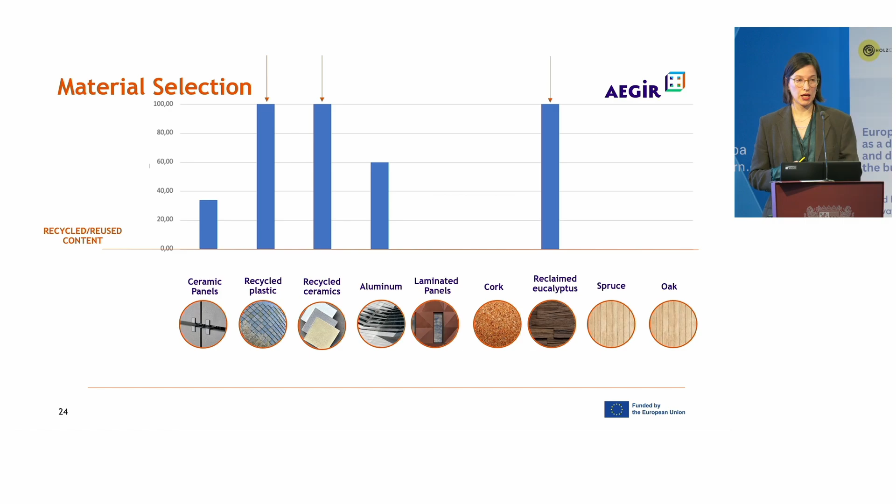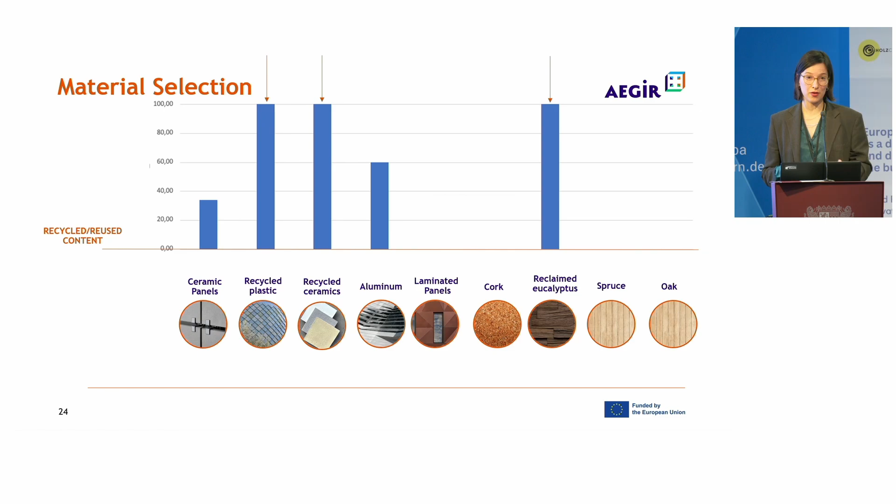But our next indicator would be how much secondary material is actually used. In this case, aluminum performs quite well, but also other materials such as a plastic tile made of 100% recycled windows, or recycled ceramic tiles made 100% of construction waste. But we can also see that reclaimed eucalyptus performs very well in terms of CO2 and also in terms of reuse. That's why we propose the architects use reused wood.

So we had a deeper look into what is there on the market. Thanks to Vanesa, we looked deeper into construction timber, pallets, or eucalyptus wood from mussel platforms, and we also compared it in terms of costs. And what we see is that it performs quite comparable to primary wood.

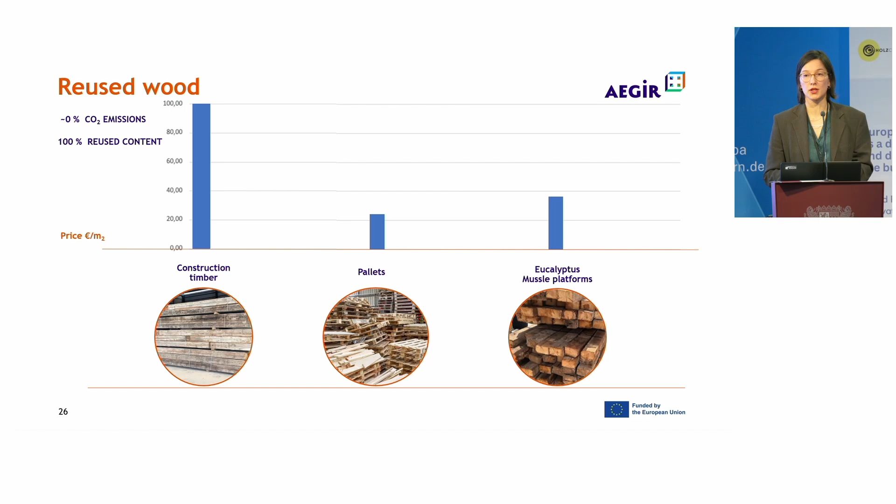And last week we were at the General Assembly in Romania, and finally there's a decision on what materials will be used in the Spanish demo case, and luckily they decided to use reclaimed wood. But they're only going to use it partly because, again, they are afraid of water damage, so it's very much covered. For the other cladding material, they're still looking for materials, so we are suggesting to them, or what they are looking into, is laminated panels.

So again, this whole analysis begins with, what is the panel with the smallest CO2 emissions and the highest recycling content? So if you have any ideas, I'm very much looking forward to hearing them.

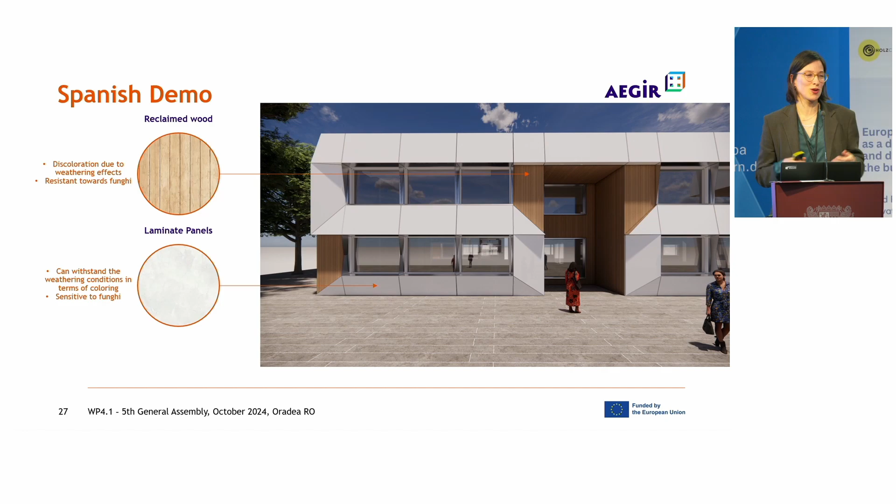So to conclude, in terms of the reuse of wood, it has a great carbon footprint. It's reused, so in our terms it's very good. It can be even cheaper than primary wood, and nowadays it can be, in the future, reused by 27%, so this is just an estimation. The downside, unfortunately, is that we might need to treat it further, it might be contaminated, so you have to look into that, but also future paths, how are we dealing with it going forward.

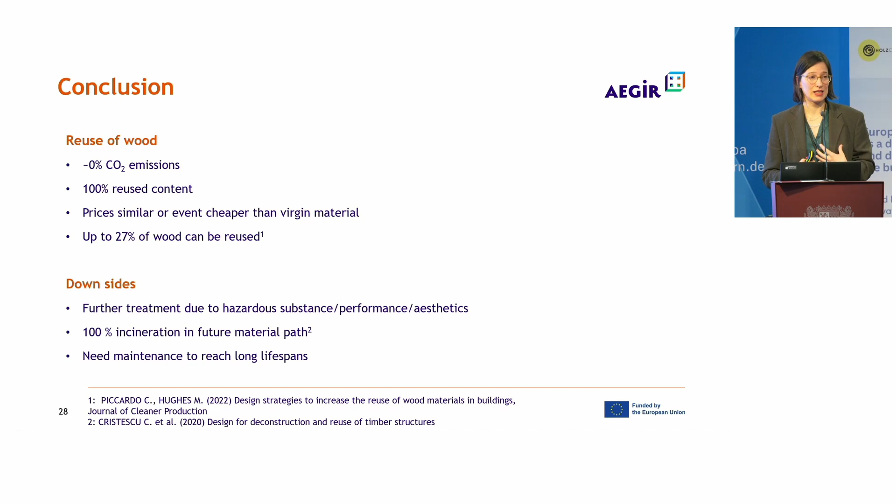So what happens nowadays is mostly incineration, so we should change that. Again, regarding maintenance, based on our experiences with the owner, they're very much afraid that they have to maintain it, so we might find some solutions which ease that.

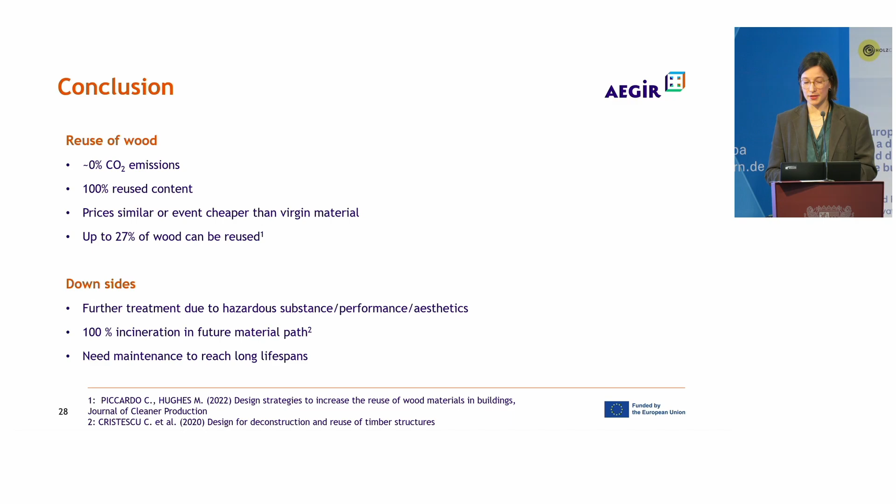Our takeaway so far from the project is that we need to holistically evaluate products. So it's not only LCA, but we also need to include other KPIs such as demountability or durability. And again, we cannot leave the architects alone with this decision making. In an ideal world, they would have a consultant that helps them take decisions. We heard the problem with data, so it's actually hard to get data. We need to share more data about products, where they come from, etc.

Product optimization is a long-term process. We hoped to speed this up with this project, but it actually takes several years to develop a new product, so hopefully that speeds up. Reusing products is ideal, but not always possible. We learned also today that LCA for renewables sometimes is misleading, so methodologies need to be optimized, and other KPIs should be included in that.

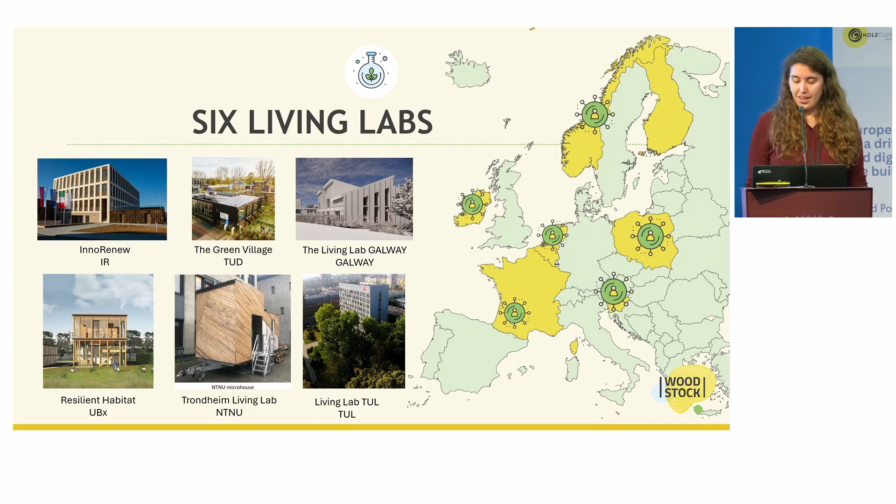As I said, we had the kickoff earlier this week, and you might have noticed a lot of our partners are actually in the room today. It was a great event, very inspirational, so we're hoping that with our methodology, we will be able to do the project as we are expecting.

As I said, the whole project fits within a living lab framework, so we will co-create a lot with stakeholders and actors, which will be students, practitioners, policy members, so we will try to reach everybody.

Part of the method here is we will map the material flows that are out there, not only coming from the forest, but also from the building stock. We will look at the carbon flows, and we will also look at the environmental impact because we're also going to work with dynamic LCA, and try to come up with a robust tool that can be used by many people.

The idea is also to have, at the end of the project, very concrete policy and business strategies to be published. For any policy people here that want to follow the project, the last slide I will show a QR code. We're also going to develop a roadmap for mainstream wood use in Europe.

Through these co-creation processes, we're going to develop zero waste and circular wood products, so both products, building elements, and building designs. And we're also going to develop a wood book for that.

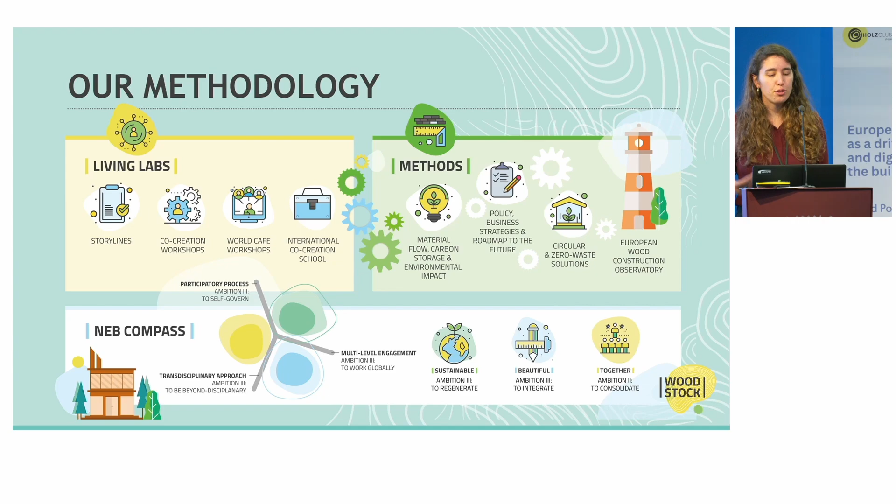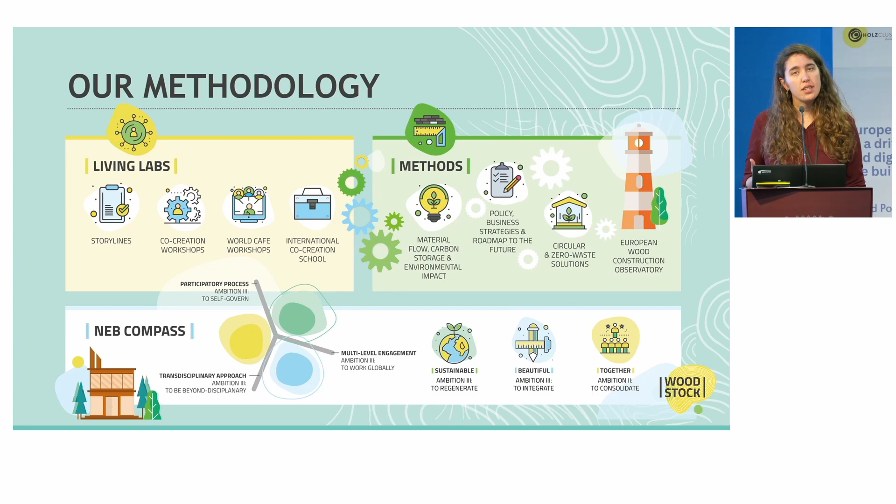What you can see also here is a NEB compass. We're not doing a New European Bauhaus session here, but just to show you that these values have been important guidance while we were writing the project, and it will also be an important guidance throughout the project.